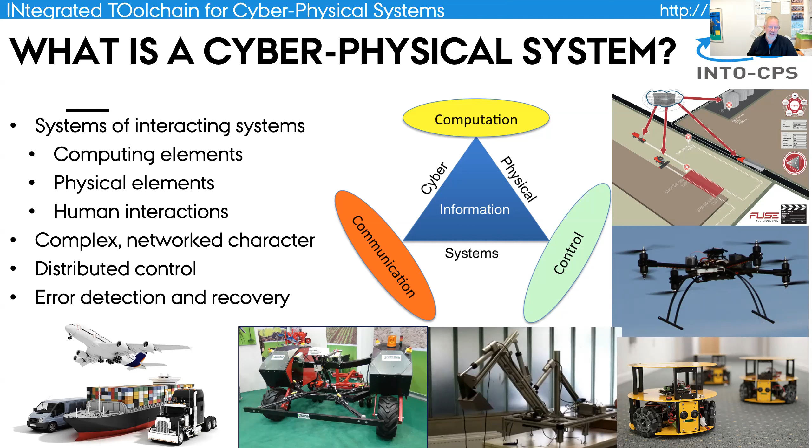And therefore, because they are quite critical, it's important to be able to detect errors and try to recover from these. The pictures you see here are from some of the different projects we have been involved with over the years. And these are demo cases that can be used for demonstration of the capabilities we have developed.

And in most cases, you would only think of the controller on the plant, that's the cyber physical system. However, the cyber physical system may in some sense also be dependent upon the environment in which it's residing. So for example, if we have an agricultural vehicle driving on a field, it depends very much on the kind of surface that it's driving on. And if it's been raining for a month, the performance will be different from if it's been dry for a month, for example.

Now, we have had a series of EU research projects. The ones I showed you before, the ongoing projects, were funded both by national funds and also by international things such as Horizon Europe or Horizon 2020. Now, the current things are getting into applications into Horizon Europe. But if we take those projects here, the DESTECS project, which happened a long time ago, resulted in a book, I have it on my shelf over here, in order to try to say, okay, how can we actually build embedded control software and how can we take the physics into account?

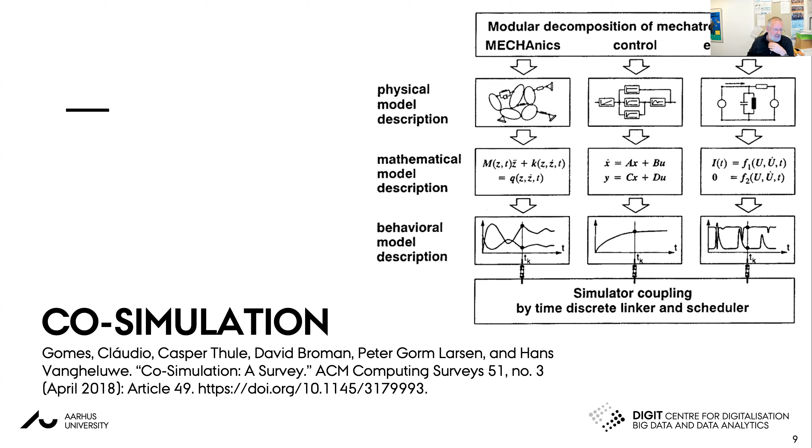And when you have cyber physical systems, they're characterized by having control, typically based on discrete math, and a mechanical or electronic thing, typically based on differential equations. These different kinds of mathematics are very seldom present in one tool. And therefore, what we are working a lot with is how we can combine different simulation things and couple them together. And for that we are mostly following a standard called the Functional Mock-up Interface, coming from the automobile industry.

Now, the INTO-CPS tool chain went all the way from requirements, also using SysML, some of you may know, to being able to automatically generate the skeletons for the models that can be used in this FMI context, and then having heterogeneous models where you can typically do co-simulation, model in the loop, before you go over to production of either real code or real mechanical hardware.

And then we had tool support that enables strong traceability based on something called OSLC, and then being able to do configuration management, design space exploration, and test automation. I'll show a glimpse of some of these things, and I'll twist it up to digital twins later on.

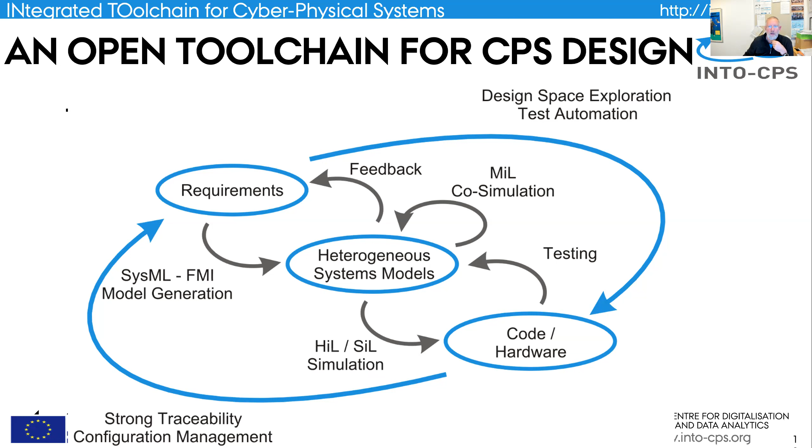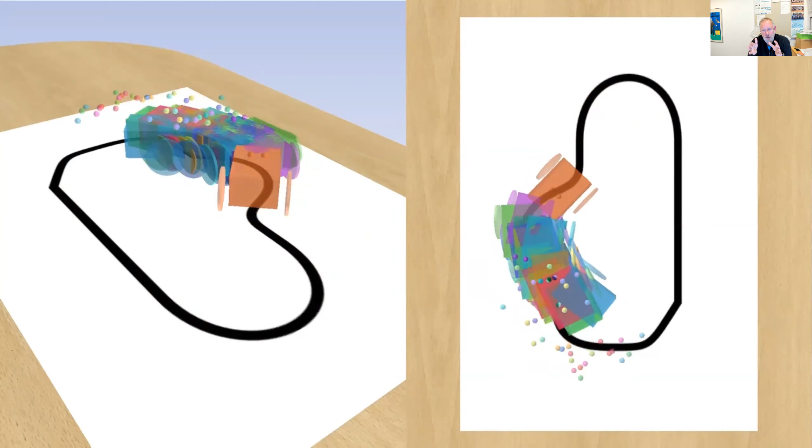Now, if I continue, I'll try to show you a small example of how you can do a design space exploration. This is an academic case study where you have a small robot moving along a line, typically child kind of thing. But what you see here is a number of videos put on top of each other, and each of them are chosen from a Pareto front of the optimized ones, given the placement of the sensors. You see the orange one is very slow, but it follows the line very precisely. Some of the others are more like Formula One cars driving too fast and getting ahead of the pack.

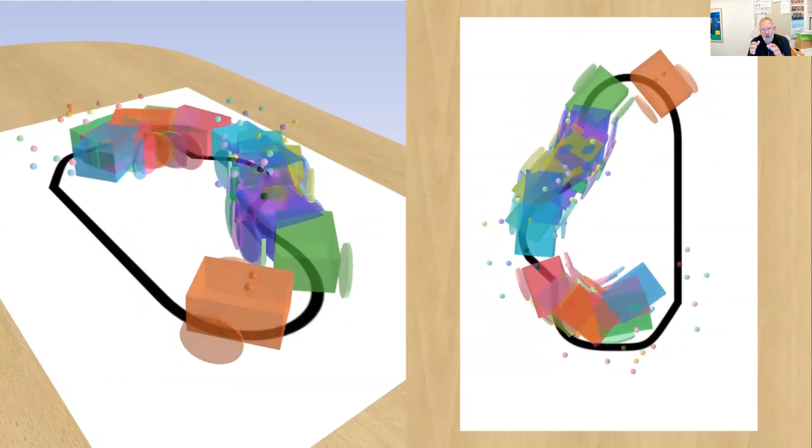But the point here is that this is an excellent way of being able to visualize for, in particular, non-technical people, what's the consequence of different design choices, so you can make a decision on what are the things you would like to go for.

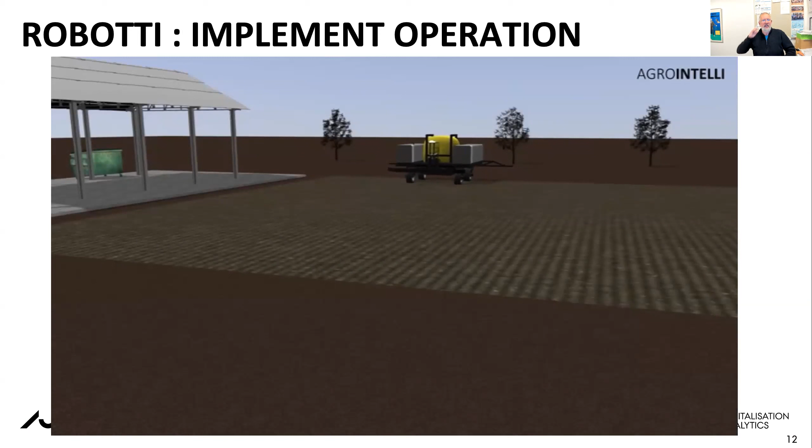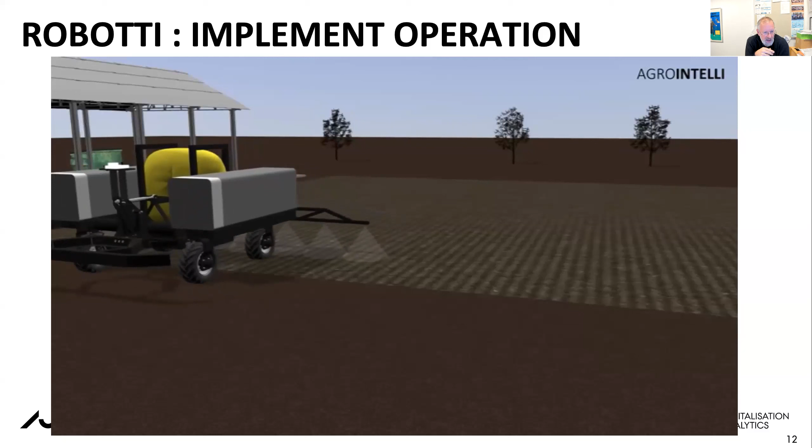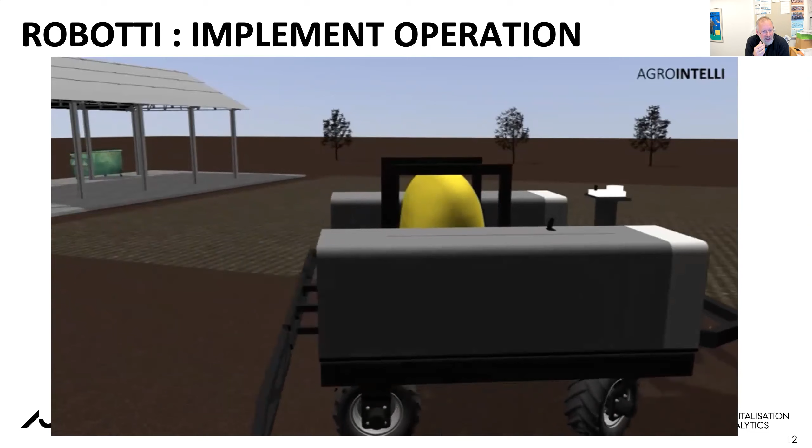Now, to give you a more industrial case, here you see an autonomous robot used in agriculture. It's from a company called AgroIntelli. The first versions of this robot were produced in the INTO-CPS project. It's now a commercial product. It weighs 1.5 tons plus the instruments you have on it. And you can see this one, for example, is stopping to spread poison on the field after it's done what it needs to do.

And essentially, this kind of doing dynamic models of cyber-physical systems and their control is what made this product go as far as it did. They got an investment for around 20 million euros last year, and they are flying away and selling these all over the world now.

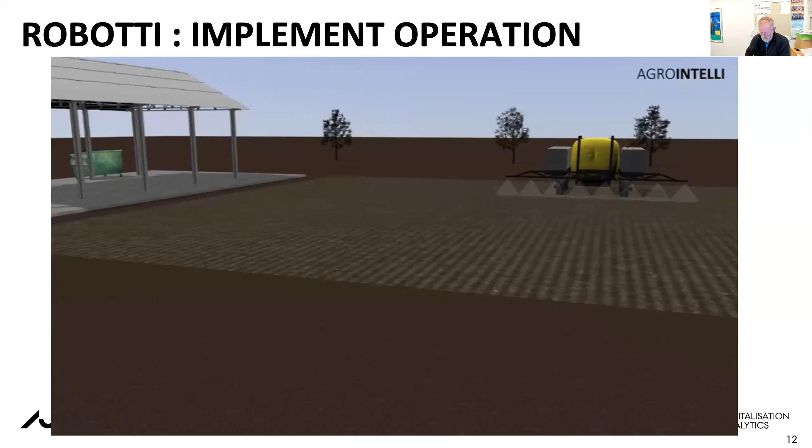In general, with respect to modeling, I think that the thing that's changing now and really going to have a dramatic difference for time to market is that instead of having a series of prototypes, you still need prototypes, but maybe not as many as you did in the past, and having document-based things where, in particular, testing of the physical context can be expensive. Maybe you can't test all year round.

What's happening now is that digitalization is creating disruption. You're combining models for cyber parts, for physical parts, and then we can include game engines to visualize things, which makes it cheaper, much cheaper, and it's possible to feel a product before it actually exists.

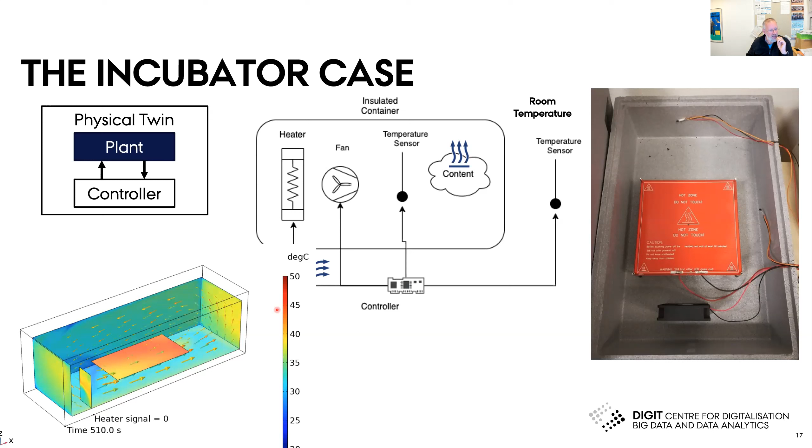from a controller outside. Such a model can be very, very slow in simulation, but we can make approximations of that using reduced order models, so it can run in real time. What's more important is that we're actually able to detect faults when they're happening. So if, for example, I take the lid off this thing, the volume that it needs to heat up is much larger. Therefore, it'll take longer, but I can detect that the constants have changed.

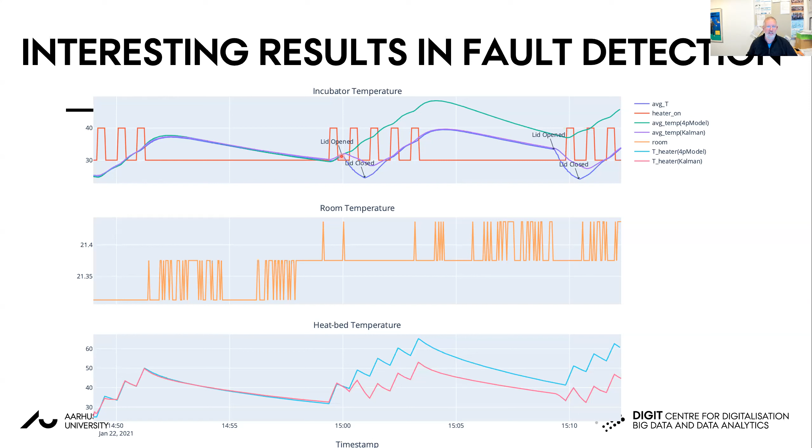And then we are feeding it over to the digital shadow by means of a RabbitMQ, so MQTT kind of server, that can enable us inside the digital shadow both to record the data, put it in a database, but also to do feeding of the models at runtime by means of an orchestrator that can then enable you to do what-if analysis. What happens if I would try to do this to the model, if I open this lid, if I did this other thing, and then do state estimation in general.

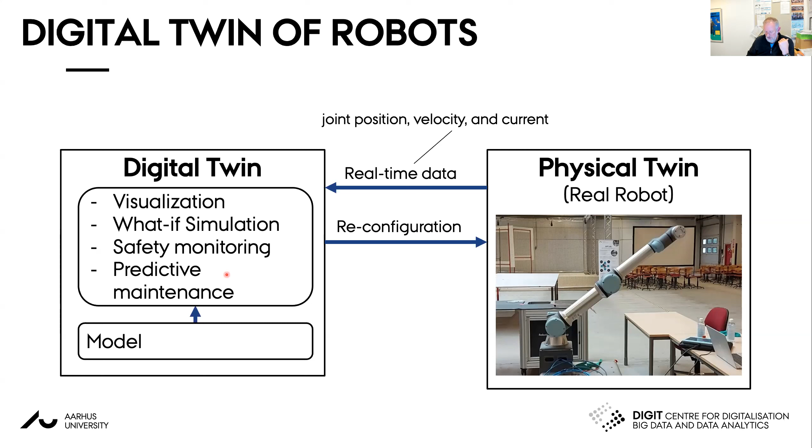So we also have more realistic kind of case studies, more industrial-like. What you see here is the Universal Robot, 6 joints. And then we have also a digital twin version of that, where we can try to play out with different things based on the model we have of it.

Now, what we try to do here is we try to predict the current at each joint in addition to its position. And we have a maximum, in this case, a 5 kilo payload. And here we want, in the future research, to be able to automatically detect what's the weight of the payload that's placed at the endpoint device out here.

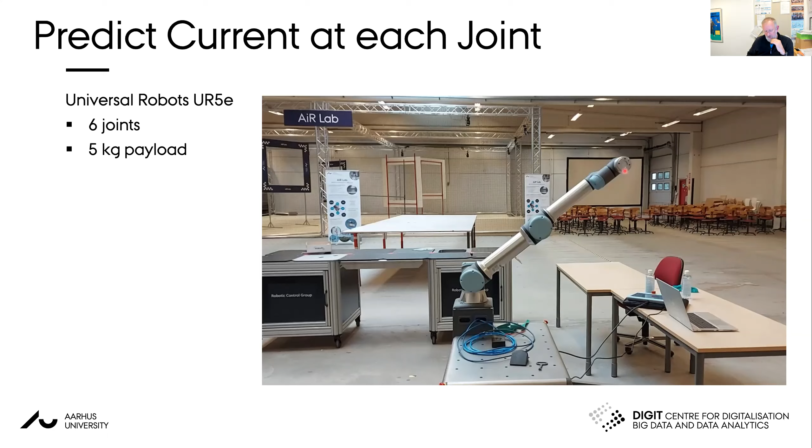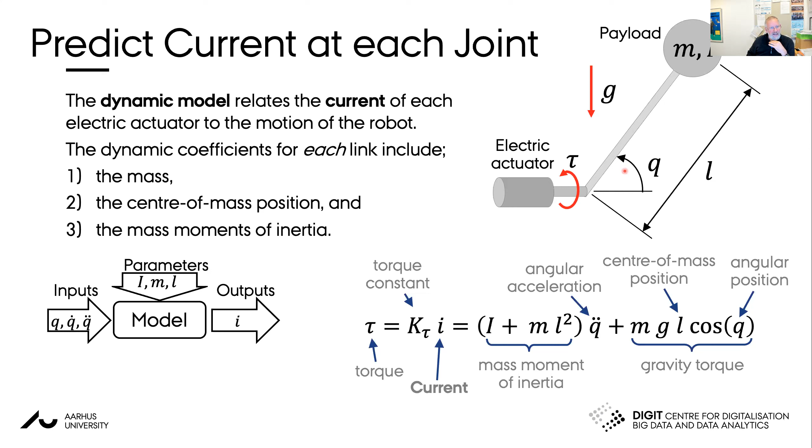Of course, in order to have a model of this, you require some mathematics, physics. I'm not going to go into this, but this is essentially the equations that are based on each of the joints that we have in here, depending upon the gravity, and then you have yet another coordinate system at the next layer, and that needs to be taken into account.

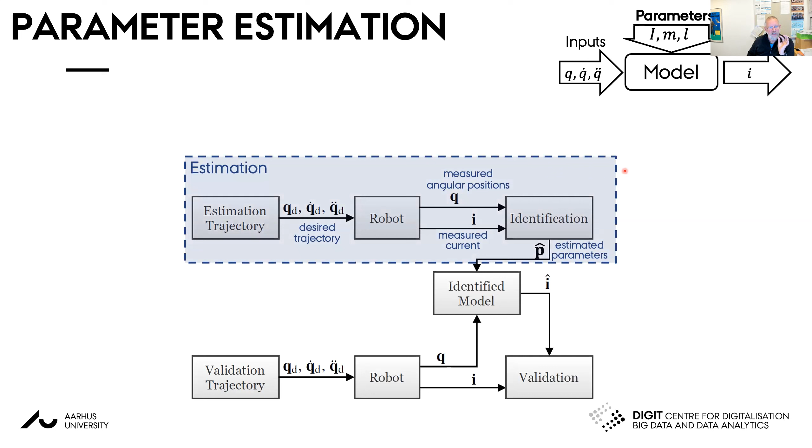But what we try to do here is we try to have parameter estimation. So estimation is done at one level, and then when you have estimated the parameters, you need to validate the parameters actually fit the real system.

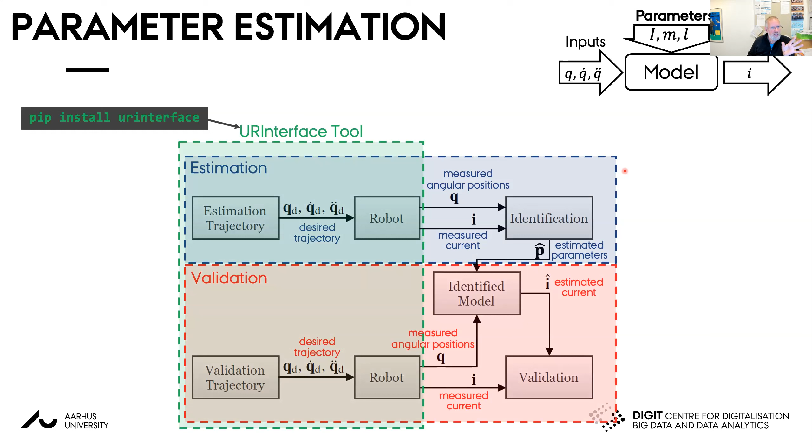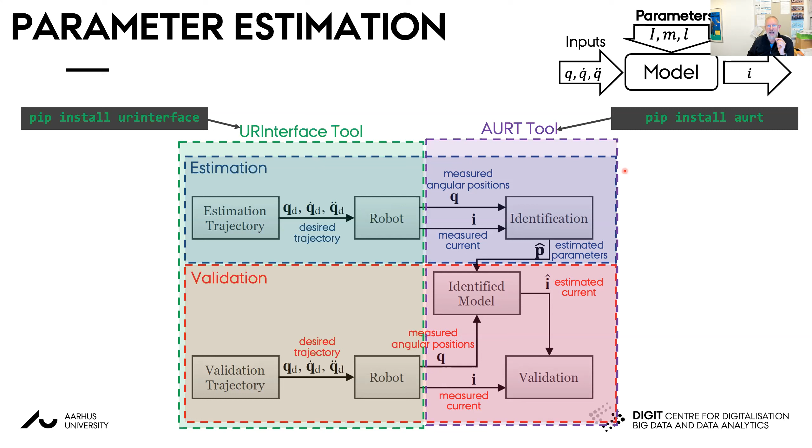So Universal Robots as a company, they have a tool called UR interface that you can install like this, and it works perfectly for these things, except they don't have the system identification and the estimation thing. We have built that in another tool. One of these tools belonging to the INTO-CPS association is called AURT, the robotics technology tool, which can be installed in exactly the same way. And this enables us to kind of runtime get data from the robot as a stream of data.

So if we try to gather such data, so you see here, I'm making the robot doing different kinds of moves. What you see down below is the position, the angle for each of these 6 layers. And then at the bottom layer, you're seeing the current for the motors at each of these layers. So here we record it now, and that's recorded using the AURT thing.

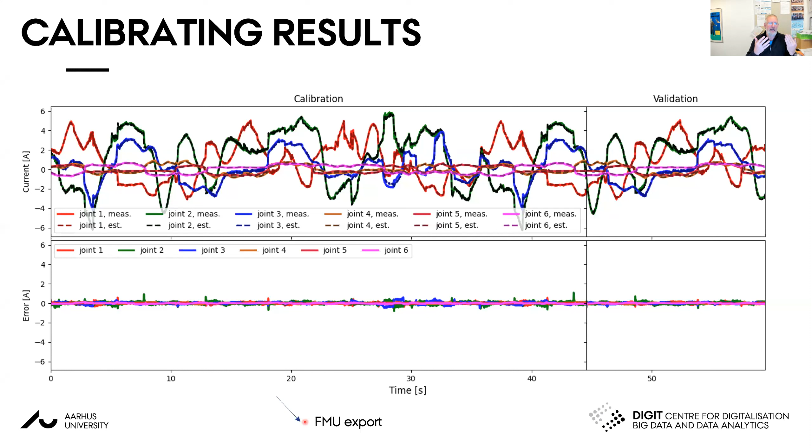Now, when we then have this recorded, we can actually calibrate it. So just like I talked about before, we have a calibration phase and a validation phase. What you see as the dotted lines that are kind of on top of the other ones here, that's actually the calibration things. But when we then have completed this, we can automatically export this to an FMU, a functional mock-up unit, as an independent unit that can be coupled together with other things. So we can do simulations with that on its own.

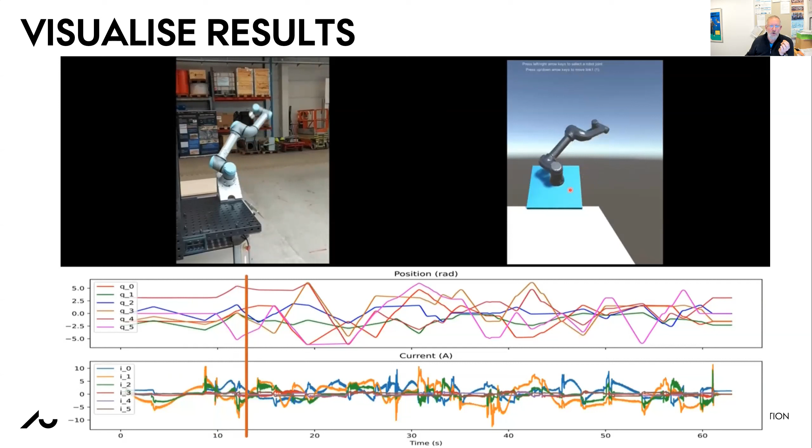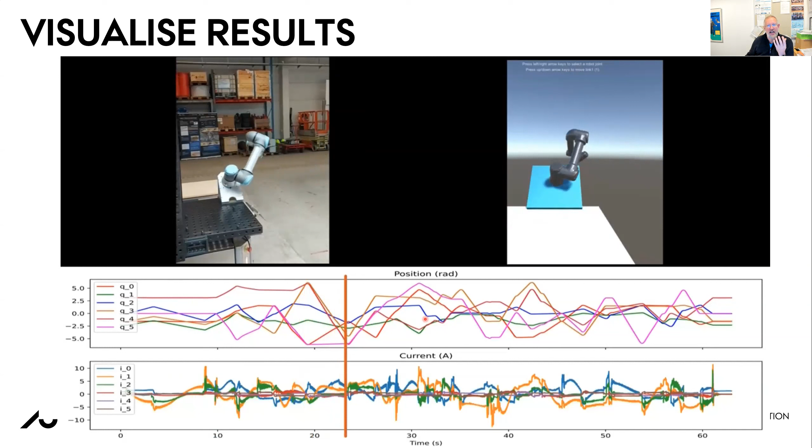And we can also, as a digital shadow kind of thing, visualize it. So what you see here to the right top is actually a visualization made inside Unity. It's a game engine, which is trying to show how things are moving. And it's purely based on the position information that's here. So that's a digital shadow kind of thing. And in order to easily integrate this into an FMU, we are using another tool that I'll come back to later.

We have a series of projects which are more applied research together with external partners, where we also look into combinations of first principle models with machine learned models, visualization as you've just seen, but also scaling up to system of systems level. We also try to do digital twin innovation, typically together with small and medium enterprises.

In Denmark, we also have a kind of organization called Global Technology Services. They're like Fraunhofer in Germany, and they are helping in particular SMEs, and we typically collaborate with them in order to get the technology transfer working in the best possible way. We also act as a digital innovation hub, which gives advice to people about how to get started with digital twins, when it's worthwhile doing it.

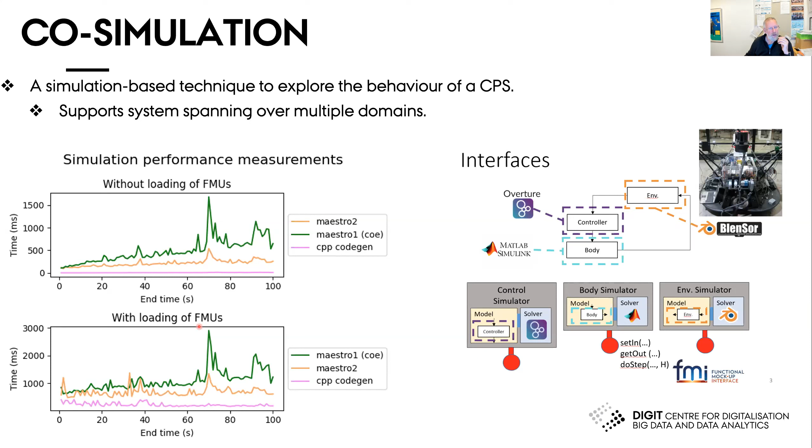What I've shown over here is some performance curves in a paper that has been submitted, but is not yet published, which compares the original Maestro we made in terms of performance, and then our Maestro 2. And finally, a code generation version of the Maestro 2. So both of these are actually interpreted, but this last one has been generated to plain C++ code. And you see it's quite a lot faster, both without loading the FMUs for real and also with loading the FMUs. So it gives you some kind of performance indications.

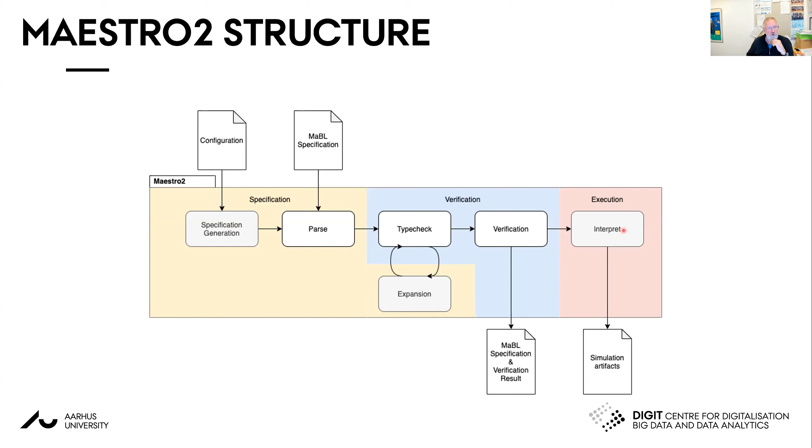The structure of this newest version here is a matter of trying to have a configuration which is being used to generate a specification written in what we call Maestro Base Language. It's a domain-specific language which then is being parsed, type-checked and expanded upon, and then it's being verified that, yes, this will actually work before the interpreter is called or the generated code is being used. So this is essentially the basic structure of the Maestro version 2 thing here.

Now, UniFMU at the moment has been instantiated with Python and C#, but also with other environments like Docker and Unity. And essentially, it's a matter of trying to get C code generated so it's easy to connect any piece of code you wish for part of your system to C, and then the standard for that. That's also being used for the Unity integration.

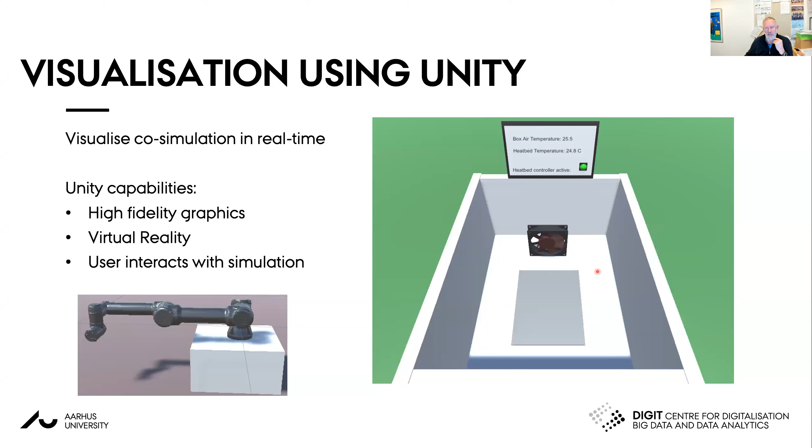Unity is coded in C#. You've already seen me simulating parts of this with the UR robot thing. Here's this picture from the incubator. And of course, we have more of those.

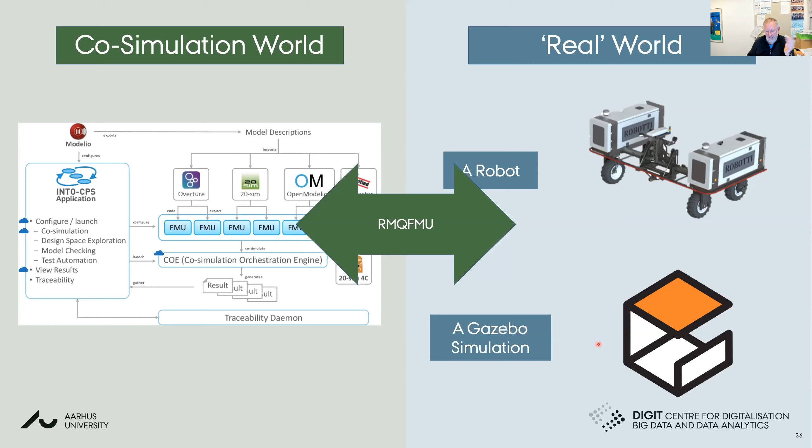And the connection of this to a real world, either a real physical robot like this, here data is stored in the AWS server in cloud, but it could also be Gazebo. It's another simulator where you simulate things, you see how it would work. And then we connect the data here using this RabbitMQ thing.

The more later thing that hasn't been published much yet is about if you have these different connections for FMUs, you can actually try to do fault injection. So it would kind of say, well, I'm going to inject this fault here, particular place at a particular point of time in order to see how does the rest of the system behave. This can also be made in terms of like a file for events that's going to happen.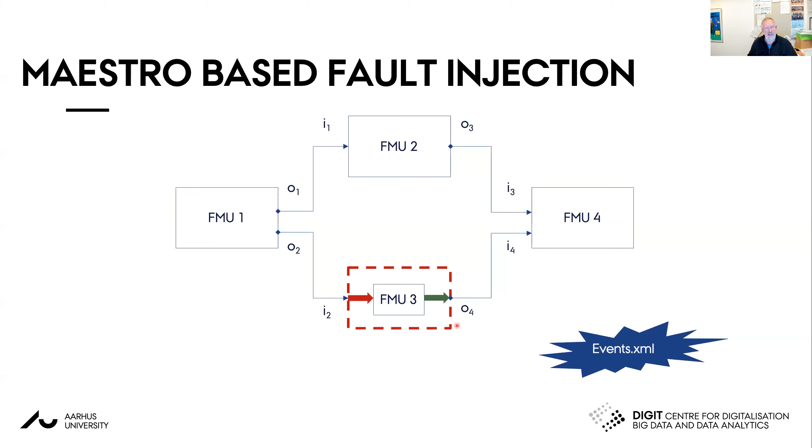And then there's like a wrapper being produced around an FMU, which kind of can send data straight through without any kind of intervenience, or it can intervene and say, okay, I'm going to do something with this particular stream of data. And that can be the fault that we want to see and how to analyze how it can impact the rest of the system performance.